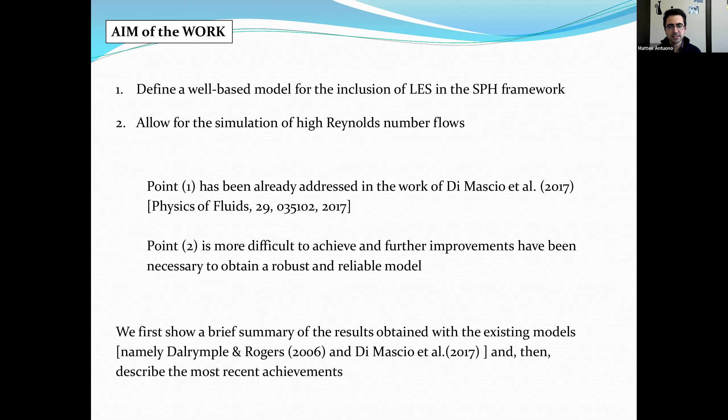I recall that we are also going to do some comparison with existing models in the SPH literature, specifically the model of Dalrymple and Rogers, one of the first attempts to include LES modeling inside the SPH framework.

As for the model of Di Mascio et al., this has been defined by using a Lagrangian filter, here denoted by the letter phi, applied to the Navier-Stokes equations for compressible and barotropic flows. The filtered quantities are indicated by the tilde symbol, and after some computation it's possible to obtain this system, which has basically the same differential operators as the standard SPH models, plus some additional terms in the continuity equation, specifically C1 and C2, and additional terms in the momentum equation, M1 and M2.

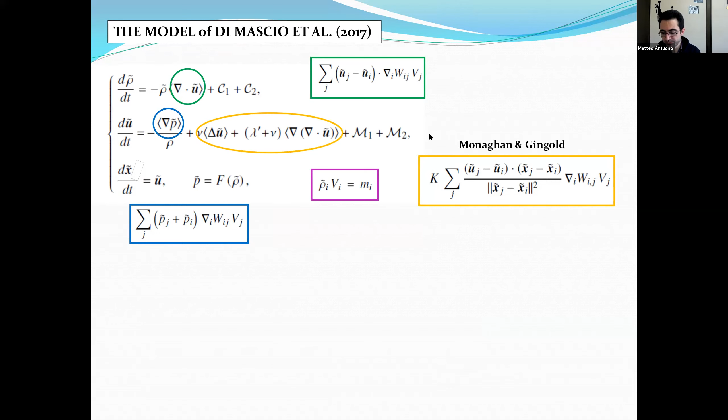For C1 and M1, these are the filtering terms, accounting for the differences between the filtered and unfiltered differential operators. It's possible to show that these are very small and can be neglected.

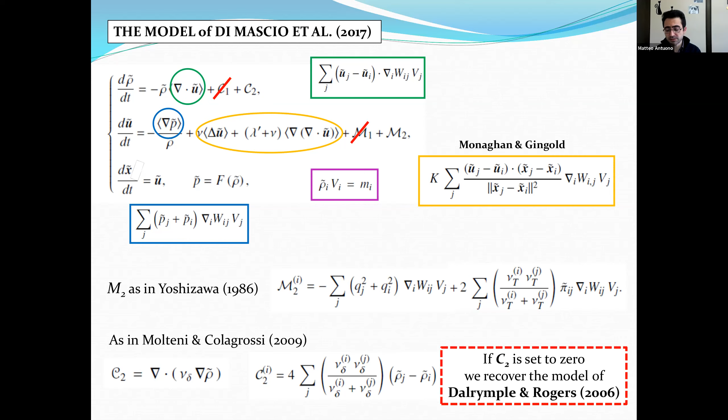For the remaining terms, these come from the LES approach. The term M2 in the momentum equation has been modeled following a standard approach going back to the work of Yoshizawa, while the term C2, which is new and just arises in the SPH framework, has been modeled through the diffusive model of Molteni and Colagrossi. What's very important to stress is that if we neglect the term C2 completely, we obtain back the model of Dalrymple and Rogers.

Here are some details about the modeling and discretization of these terms. For the term M2, we use a standard coefficient from the LES literature, going back to Yoshizawa and Smagorinsky.

For the term C2, we defined a sort of diffusive turbulent viscosity, denoted by nu delta, which contains a dimensionless coefficient C delta, set equal to 1.5 to obtain an order of magnitude comparable with the diffusive term of Molteni and Colagrossi.

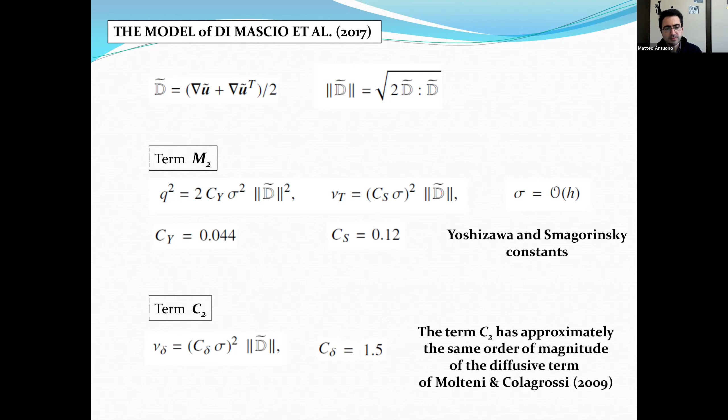This analytical solution allows us to generate a pattern of vortex structures inside the fluid domain, and this forcing term is multiplied by a ramp which goes to zero after t equals 1.

So what happens? For example, we can see the kinetic energy in the left figure. We have an initial increase of kinetic energy when the forcing term is acting, different from zero. Then for t greater than 1, the forcing term is zero, and we have freely decaying turbulence. Conversely, on the right figure, we see the typical vortex pattern induced by the forcing term.

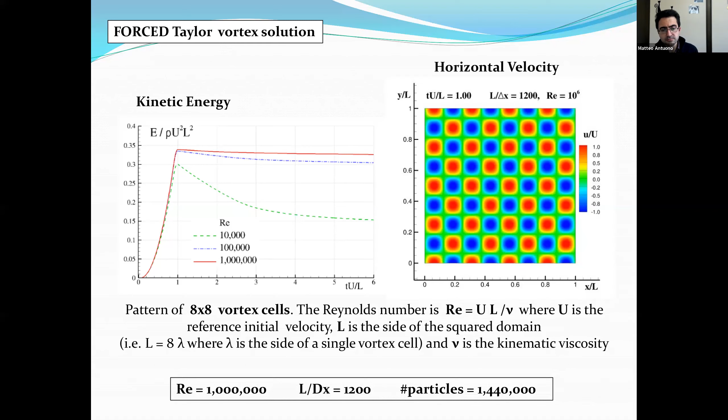In this specific simulation, we are considering Reynolds equal to 1 million and about 1,400,000 particles. These are the results if we apply directly, without any additional tool, these models—the Di Mascio et al. and the Dalrymple model—to this case.

As you can see, we have the onset of the so-called tensile instability, which leads to the generation of large void regions inside the domain and leads to the complete destruction of the solution.

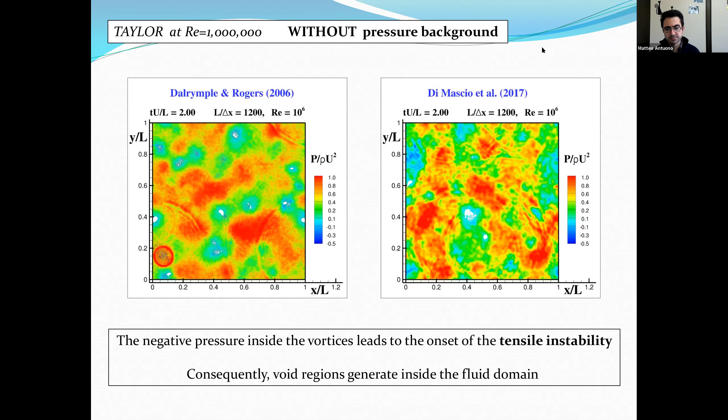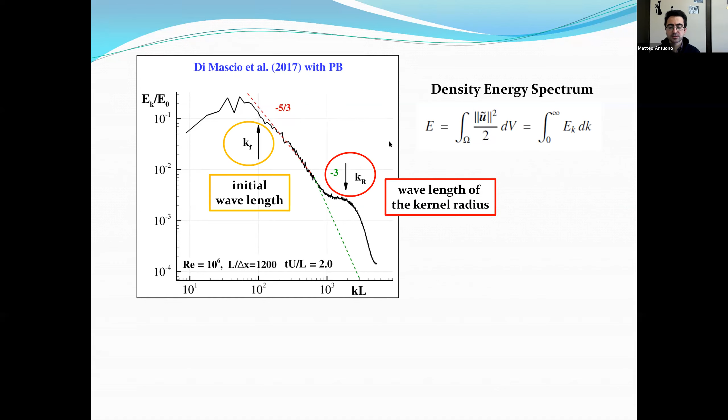However, if we compare the density energy spectrum with the theoretical findings, which predict two different behaviors, a minus 5/3 law and a minus 3 law, we observe a deviation of the density energy spectrum predicted by the model of Di Mascio et al. at wavelengths comparable with the kernel radius. The same is observed using the model of Dalrymple and Rogers.

This is because we are using the pressure background, and this pressure background induces a kind of particle resettlement at wavelengths close to the kernel radius. This resettlement has its own content of energy, which is observed in this strange bump profile of the density energy spectrum.

So to solve this problem and obtain a density energy spectrum in good agreement with the theoretical findings, we first tried to remove the pressure background, but at the same time we also had to remove the tensile instability. For this reason, we used a tensile instability control term like that described in Sun et al. in 2019.

This tensile instability control term relies on the use of a switch inside the pressure gradient, which goes from a plus formulation, Pj plus Pi, when the pressure is positive, to a minus formulation, Pj minus Pi, when the pressure Pi is negative.

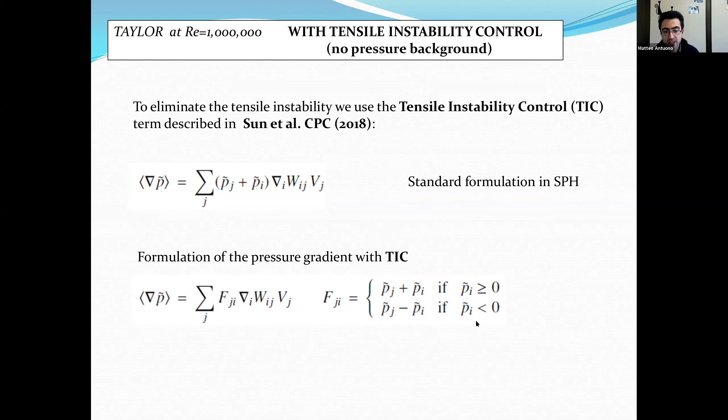Applying this tensile instability control without pressure background, we obtain bad simulations, especially for the pressure field, and also in a minor way for the vorticity field.

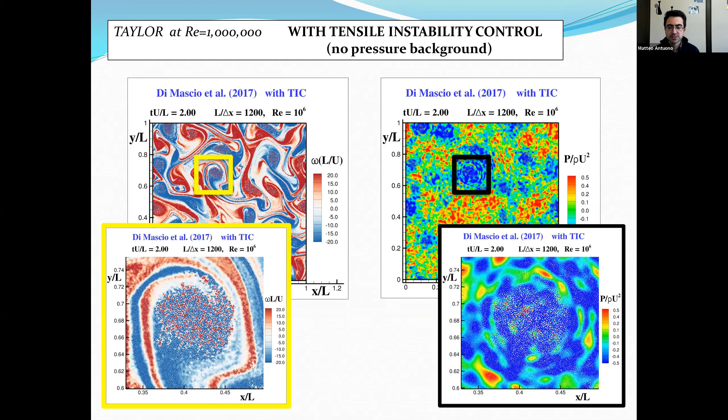This is because even though we no longer have the occurrence of tensile instability, we still have a very noisy and disordered particle distribution, especially in those regions characterized by negative pressure.

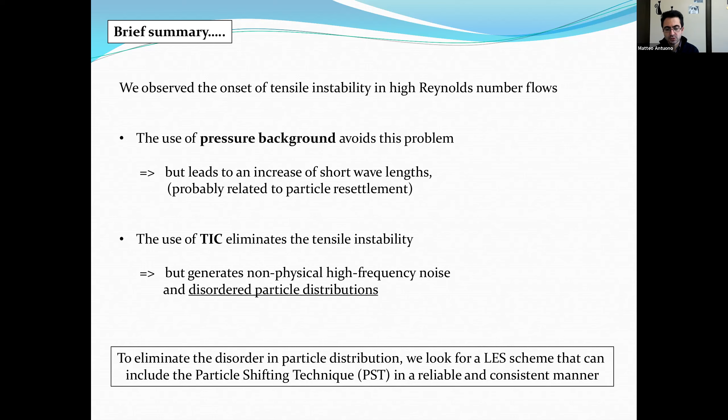So we added one last possibility: a term which regularizes the particle distribution. We tried to include in the model the particle shifting technique. Unfortunately, this is not possible inside the old model of Di Mascio et al., and we had to redefine a new model in order to include the PST in a reliable and consistent way.

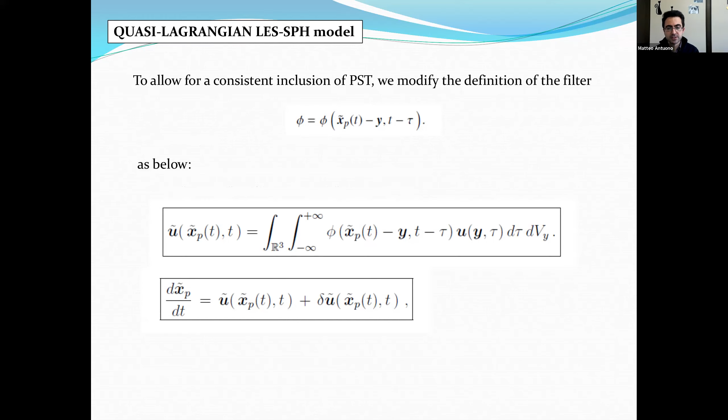The approach is basically the same as that shown for Di Mascio et al. We again have a filter, but in this case the filter is not Lagrangian but quasi-Lagrangian, because we added a small velocity deviation in comparison to the Lagrangian velocity.

We can apply this filter to the Navier-Stokes equation, integrate over the free domain, and at the end we obtain a system with additional terms, C3 in the continuity equation and M3 in the momentum equation. Like for the previous model, C1 and M1 are negligible.

Differently from the model of Di Mascio, the term C2 is modeled through the diffusive term of the delta-SPH model, because this is a fourth-order operator and is expected to work more efficiently at shorter length scales.

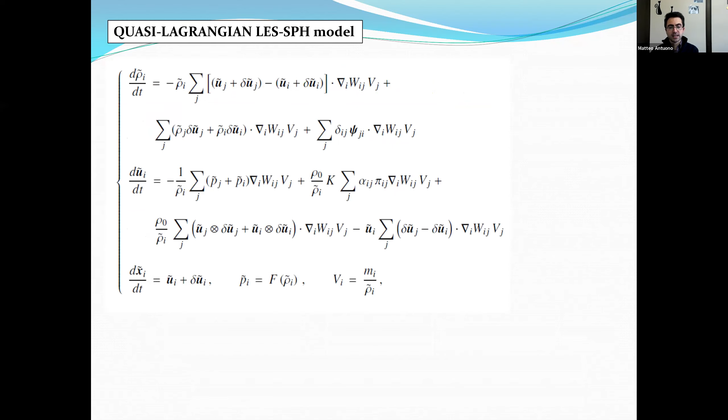Finally, we have the other terms depending on the addition of these small deviations, which, if small, allow neglecting the terms C3 and M3, leaving just one term, which can be modeled using the standard SPH differential operator, as shown in this discrete modeling of the continuous equation.

In our case, we model the velocity deviation through the particle shifting technique proposed by Sun et al. in 2019. This was the first simulation with the new model, again at Reynolds equal to 1 million.

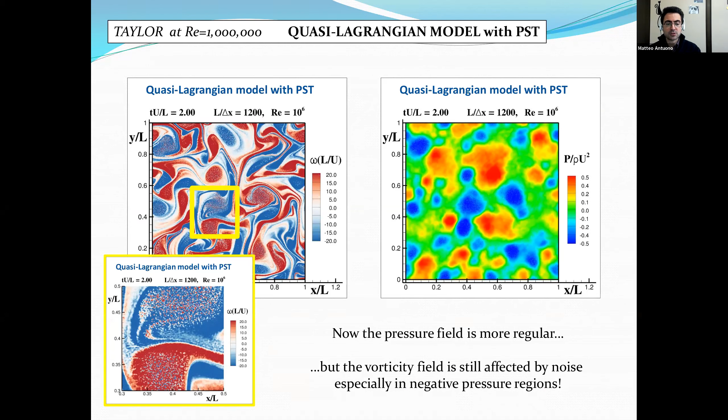As you can see, we recover a good distribution for the pressure field, but again the vorticity field shows problems inside the core structures characterized by negative pressure. This is because particle shifting alone is not enough to counterbalance the action of tensile instability.

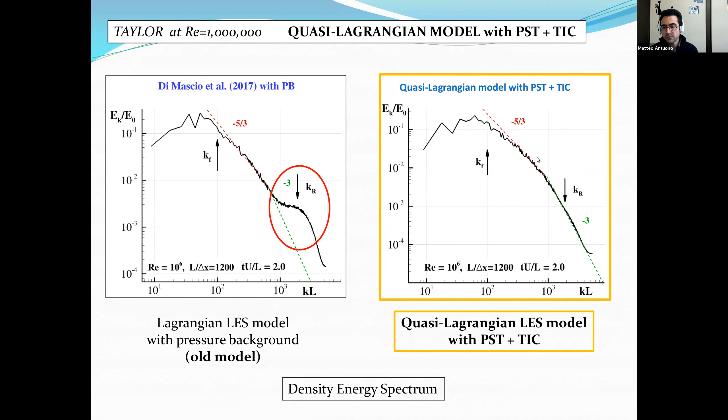Here I show a snapshot detail of the kinetic energy for both models: on the left, the Di Mascio et al. model, on the right, the quasi-Lagrangian model. As you can see, the new model is completely free from the short-length noise which affects the solution of the Di Mascio et al. model.

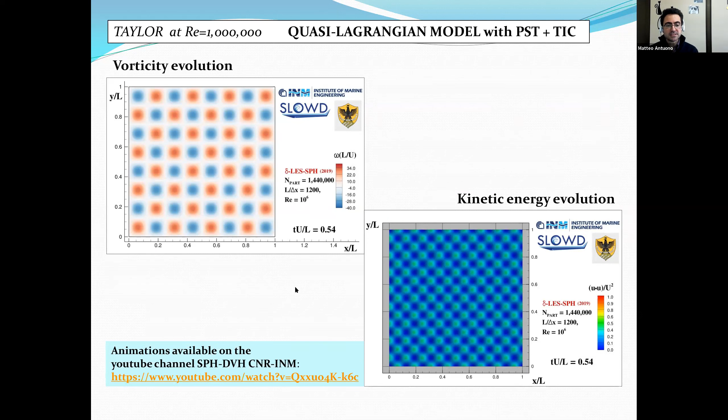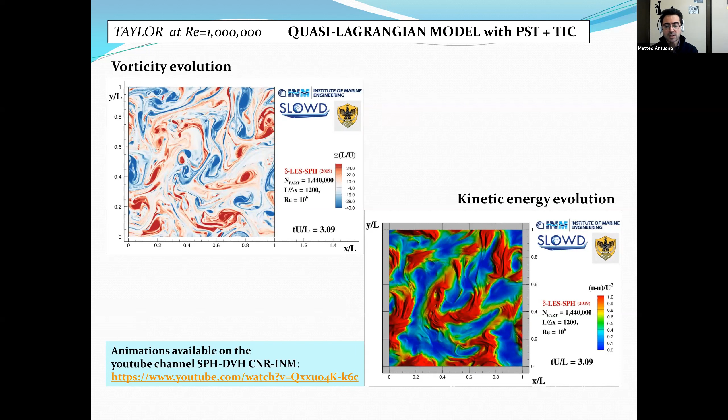Here I just show you some snapshots of the evolution for these cases. The animations are available at this YouTube channel of our SPH group, at the link below. These are the first instances in which the forcing term is acting and generating the vortex structure. Then, when the simulation goes on and the forcing term is zero, we have the onset of instability.

After the simulation in 2 dimensions, we moved to 3 dimensions. Again, we studied freely decaying turbulence. In this case, we used the same approach, that is, fluid at rest with a forcing term acting in the first second of the evolution. But here we used the analytical solution that I found in this work, Antuono 2020, in the Journal of Fluid Mechanics, which is an extension of the Taylor solution to a 3D periodic box.

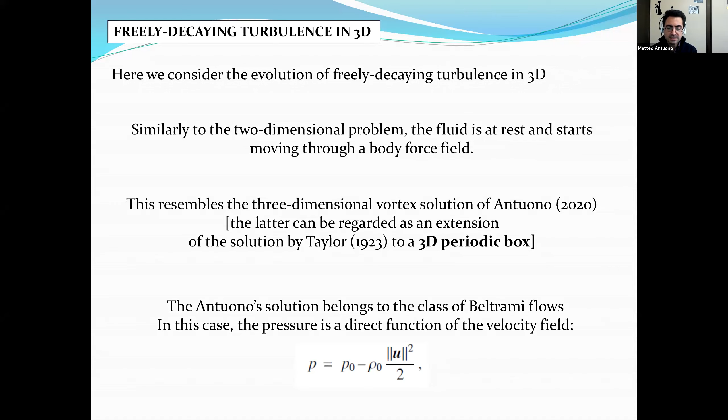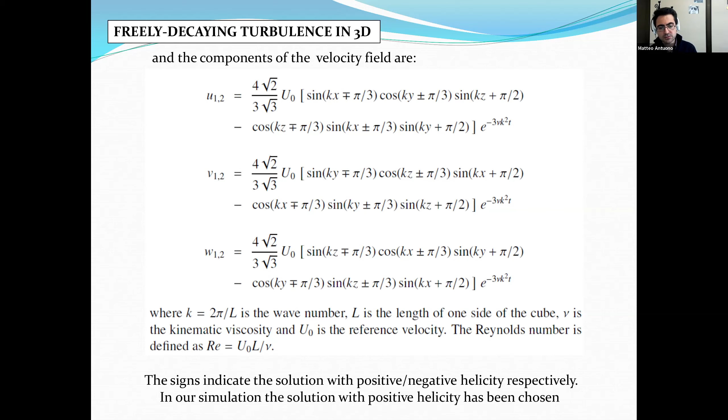In this case, the pressure field is obtained as a function of the kinetic energy, while these are the expressions for the solution of the velocity components. We actually have 2 different components, denoted by subscripts 1 and 2, depending on whether the solution has positive or negative helicity. I recall that helicity is the dot product between the velocity and the vorticity field. However, for the sake of the simulation, you can choose either one. The solution is practically the same.

When we studied this three-dimensional simulation, we also compared with a finite volume model, an Eulerian finite volume. Since these models are really different, we have on one end a quasi-Lagrangian SPH model, and on the other end an Eulerian finite volume model. The transient evolution for the kinetic energy is quite different between these models, so for the comparison, we chose different time instances but with the same amount of kinetic energy.

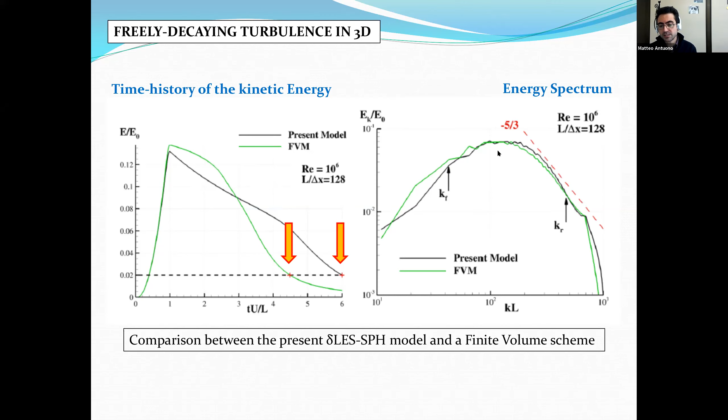These are the comparisons for the energy spectrum. As you can see, both models agree with the theoretical rate of decay, which in 3 dimensions is -5/3, and they also agree well with one another.

Just a final example before ending my talk, which is somehow a more practical application. In this case, we are studying a fluid which is put into motion inside a wing reservoir, inside a rectangular tank, and is subjected to a strong vertical acceleration, up to 10 times the gravity acceleration, as you can see in the bottom right panel.

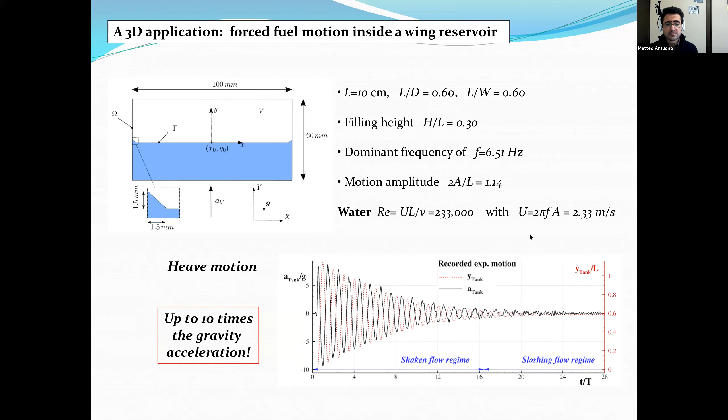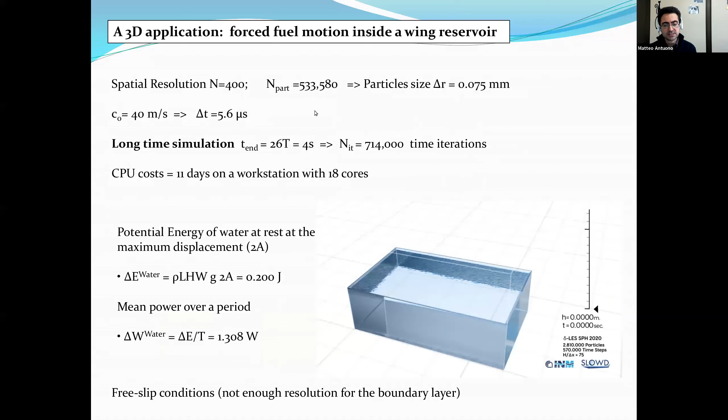The Reynolds number here is 200,000, and we use up to 500,000 particles. This is a snapshot of the three-dimensional domain, and here are some snapshots of the evolution.

What is very good for us is that both the three-dimensional model and the two-dimensional model predict results which are in fairly good agreement with the experimental measurements.

However, for all the details on this simulation, you may follow the presentation by my colleague Salvatore Marrone, which will be given at the SPH workshop of this year. And for the animation, I again address you to the YouTube channel of our group at the link below.

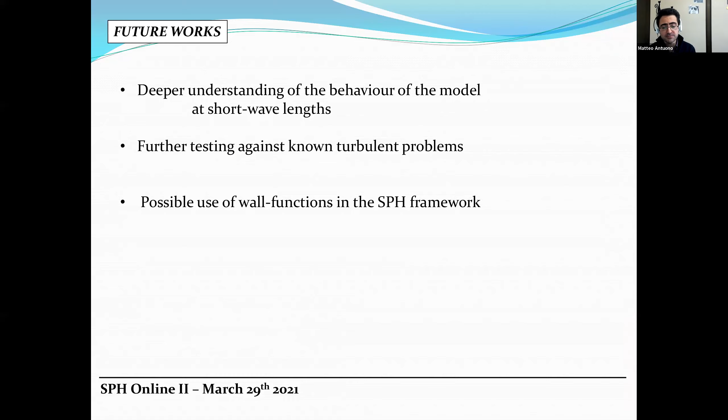Well, for what concerns future works, we are still trying to find known turbulent problems to test our model, and we hope soon to start studying a wall function for this delta-LES-SPH model. Thank you for your attention.

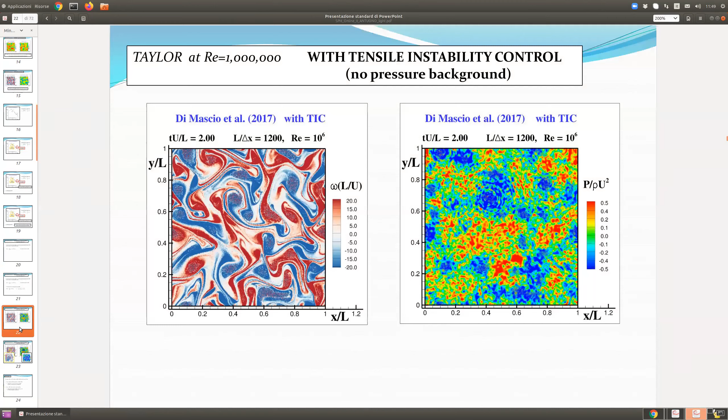Thank you very much for the very interesting talk. I could imagine that this delta-LES-SPH will be important in future. Out of interest regarding your 2D test case, how did you validate your results? Have you checked how the enstrophy within the box is scaling in time, or how did you check whether what you observe in general is valid? I understood you were looking to reduce the noise at small scale, but when we did this kind of investigation, we always also looked at the enstrophy scaling in time, because this seems to be characteristic in 2D turbulence. Can you elaborate on that, please?

Actually, we had two different problems. One was to solve this strange deviation of our model, and then obtain back a good behavior. But in this case, we just looked at the density energy spectrum. We didn't follow the evolution of the enstrophy field. We just looked at the theoretical behavior, the -5/3 law and the -3 law for the density energy spectrum.

Okay, thanks. May I ask a short other question as well? Yes, please. Regarding your personal opinion, so I really want to hear your personal opinion on this. I think from an engineering point of view, with this tensile instability control, we sacrifice a little bit of conservation for accuracy. How do you think about that? Because in engineering, I have the feeling that finite volume schemes are used instead of finite element exactly because of this.

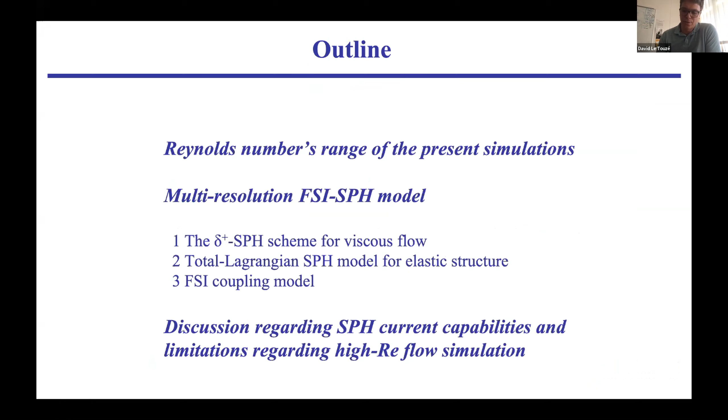In the present simulations, the ones I'll show next, I highlighted where we are in the Reynolds number range. In 2D we have fully resolved simulations from 100 to 100,000 Reynolds number, and in 3D we have laminar situations and quite high Reynolds number situations, but where we discard viscous effects—so in reality it's an infinite Reynolds number simulation. Bear this in mind; you'll see this pink code on every slide indicating whether it's 2D or 3D and what the Reynolds number is.

The delta-plus-SPH model was already presented quite extensively by Matteo and a bit by Andrea, so I won't stay long there. It's the weakly compressible SPH model with artificial viscosity and the delta term in the continuity equation—this is delta-SPH.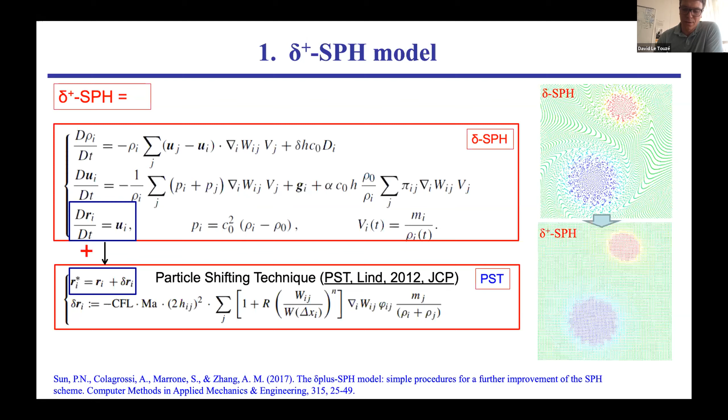In addition, there is the particle shifting technique, with this form of shifting displacement used in this work, which regularizes the particle distribution during the simulation. There was some discussion on the consistency of such a technique—at the next SPHERIC we'll have an extended discussion on the consistency of particle shifting—but at least in terms of displacement, it is consistent and has no effect on convergence.

When you have a free surface, since it has a kinematic boundary condition you should respect, the idea is not to shift particles there. We have a specific treatment where in a region close to the free surface, particles are shifted only tangentially, and at the free surface they are not shifted at all.

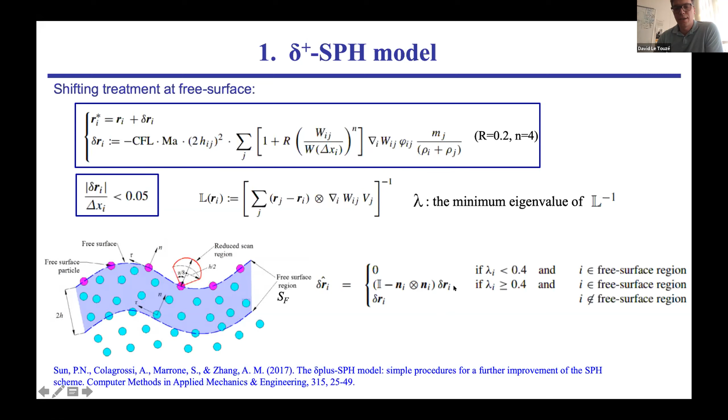Using this delta-plus-SPH, Peng-Nan and colleagues from Italy found that tensile instability was much reduced compared to standard delta-SPH—particle shifting helped prevent tensile instability. But unfortunately it's not valid for all cases, and here you have cases where delta-plus-SPH fails to correctly predict the attached flow.

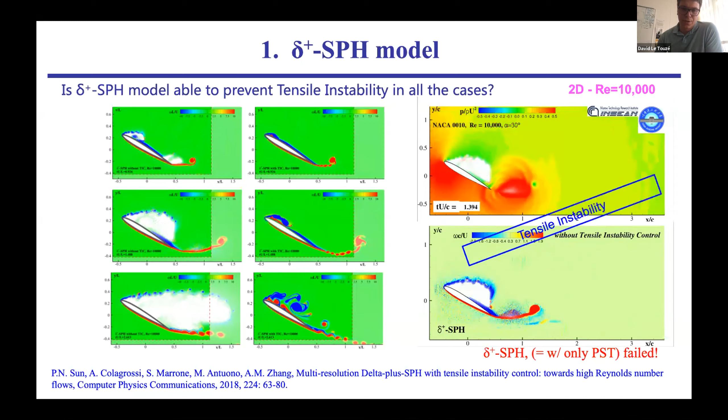So Peng-Nan and colleagues introduced this tensile instability control, described already by Matteo, with the idea that if you rewrite the Pi plus Pj version of the gradient used for conservation, with an objective of conservation, in this more accurate form, you get this 2Pi gradient which acts as shifting, as a regularizing force, if the pressure is positive.

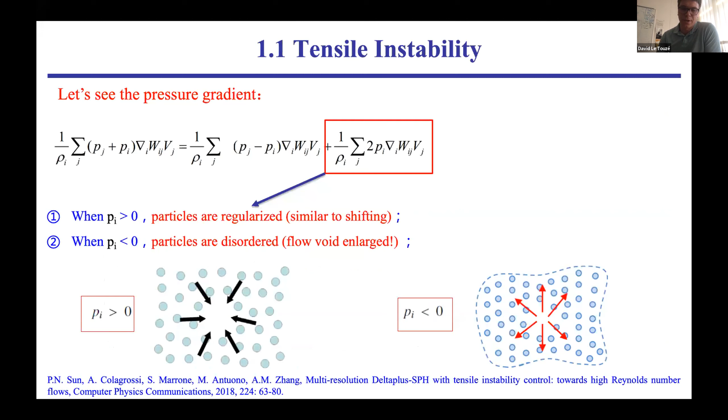But if P is negative, it acts the opposite way and tends to create voids, which we could see here on the top part of the profile. So to avoid this possibility, we get rid of this term.

Of course this has an impact on conservation a bit, as just stated. We do this only when the pressure is negative and also when we are not close to the free surface—otherwise the formulation Pj minus Pi violates the free surface condition in an integral way, and we get free surface instability.

So we use this tensile instability control in the simulation. Using both particle shifting and tensile instability control, you go from there to here. If you just use tensile instability control without particle shifting, the flow stays attached in this simulation, but you see some noise in the pressure field and in the vortices—so we really need both.

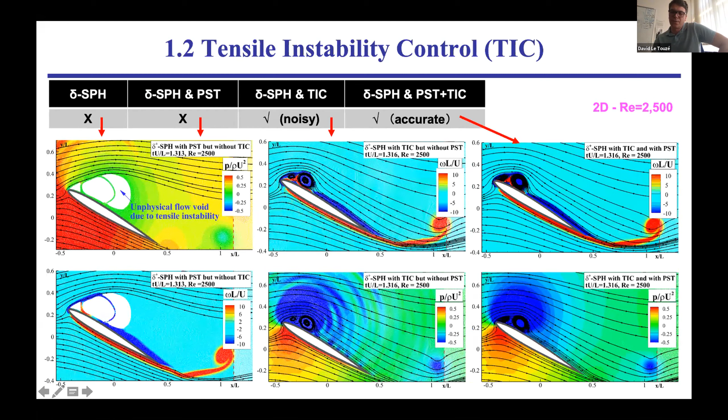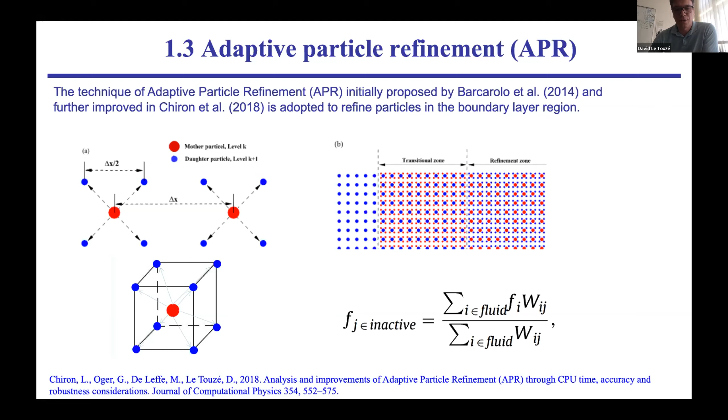The next ingredient we need is particle refinement. If we want to do complex flows, what we use is the adaptive particle refinement we proposed here in Nantes.

But I guess a quite accurate description of the boundary layer there, even at Reynolds numbers in the range of 10,000, even more, up to 100,000 maybe. But in the range of 10,000, we are okay with APR and this delta-plus-SPH model with tensile instability control.

Now I will jump to the structure model. So when you want to do FSI in SPH, with an SPH fluid solver, you have two possibilities. Either you say you will do a full FSI SPH solver, as is proposed here.

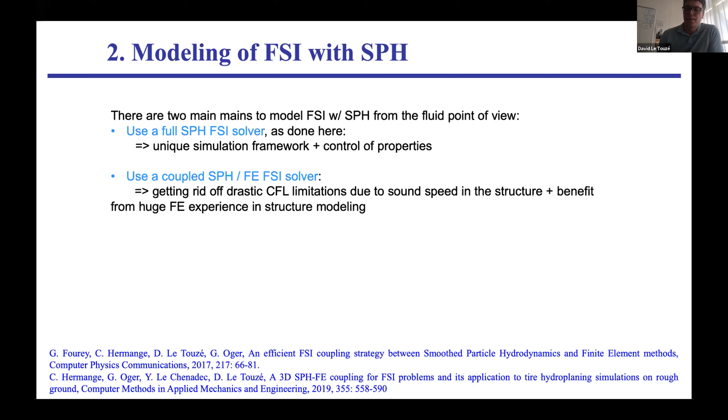So this has been implemented. It is well known that when you do this kind of SPH structural model, there is another kind of instability, an hourglass kind of instability which can appear. You can get rid of this with artificial viscosity or with some specific control, or using stress points and projections, etc. Here we use an artificial viscosity.

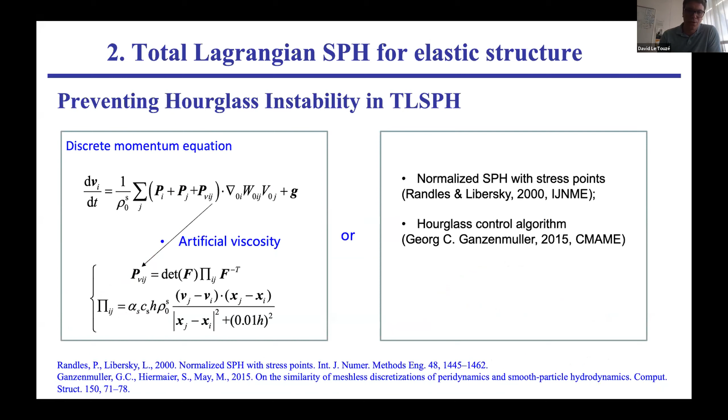And we tested this structure. So this is simply an elastic plate which is hinged to a rigid cylinder, and it's free to move due to gravity in the void. And it is compared to the result by Turek and Hron.

So we now have this validated structural solver, and I can go to FSI.

So to couple these two, SPH structure and SPH fluid solvers, since we don't have the same time steps, or at least it's clever not to have the same time steps, what we use is an MSS coupling algorithm with multiple time steps, sub-time steps in the structure, as sketched on the right part of the slide.

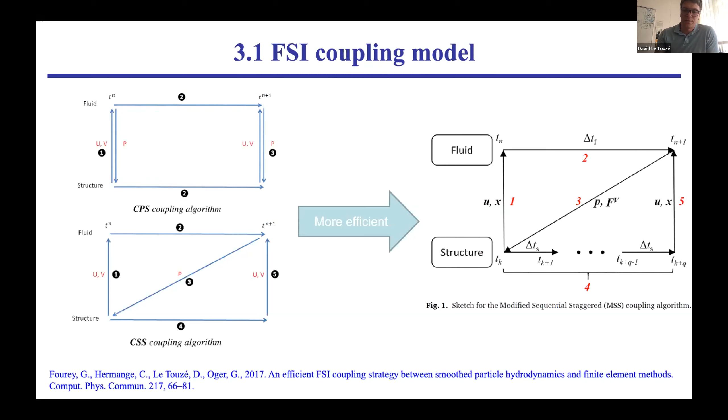And we will test this FSI solver on different test cases. Most of these results were published in this recent paper in Ocean Engineering.

So we first took the famous test cases by Turek and Hron: FSI1, FSI2, and FSI3. FSI3 is more challenging because the density ratio is 1, the speed is a bit higher, and the Young modulus is also a bit higher. We will use these test cases to validate our model.

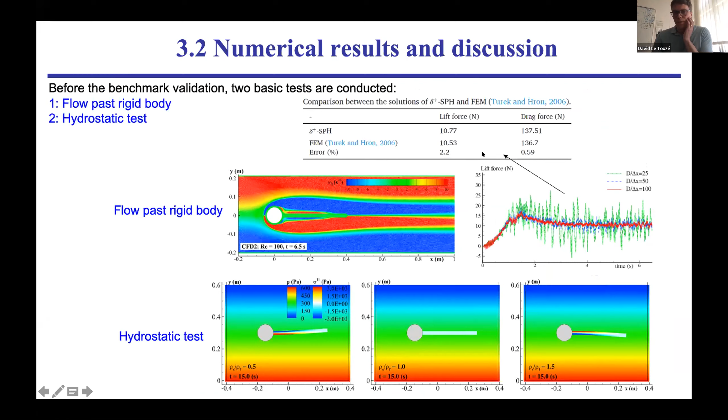Before these validations, we did a hydrostatic test case, which is always not so easy, and the flow past a rigid body to check the accuracy of the solver before activating the fluid structure interaction. Here is a convergence plot and comparison with finite element results of Turek and Hron, with errors on the force of the order of 1%.

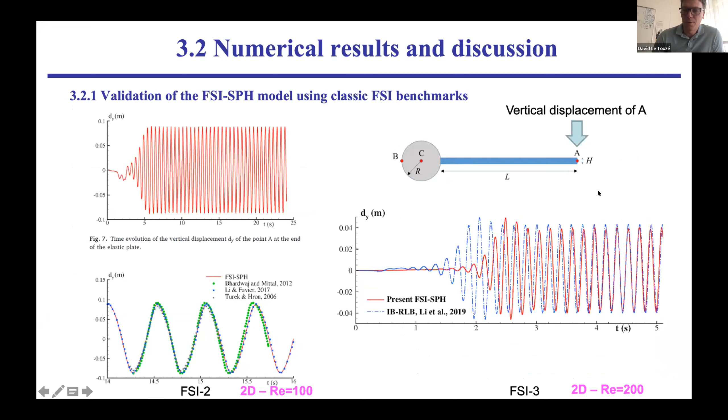These are the results for the FSI2 and FSI3 test cases. The Reynolds number is really moderate, quite low, but the flow structure is already quite complex. For FSI2, we compare to results of Turek and Hron, and also to LBM results. For FSI3, we compared to LBM simulations we did in my group. We have good agreement on the different test cases.

And we proposed an FSI4 test case with the presence of a free surface, which is quite complex because due to the oscillations of the elastic plate, you have areas of low pressure which interact with the deflected flow. You have different sources of pressure variations along the profile, and the flow and structural deformations are quite complex even at this low Reynolds number. Maybe this test case can be used by others in the future.

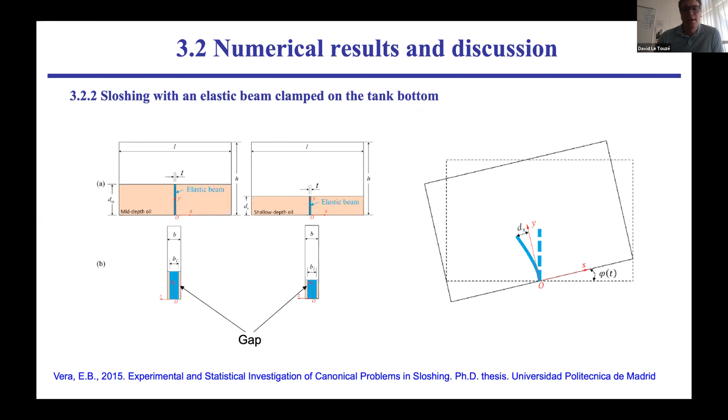What we also did, then we went to 3D. One of the nice test cases in 3D is the one developed by UPM in Madrid, where you have oil and an elastic beam in a rotating sloshing tank.

So we made comparisons. If you do a 2D modeling, we showed with my PhD students in the past that there is a 3D boundary layer effect. You have a boundary layer along the two boundaries of the tank, which is very important. If you do a 2D versus 3D simulation, you get different results, and you are not able to be close to the target. Here we clearly see this boundary layer effect, and the 3D result is much closer to the experimental one than the 2D one. We are at a Reynolds number of 1000, but in 3D this time.

And then we did a much higher Reynolds number, which depends how it's defined, but if it's defined with the water depth, it's around 400,000. In this case, we made the assumption that we could get rid of the viscosity, assuming viscous effects are negligible. So in reality, we don't simulate this Reynolds number, we simulate an infinite Reynolds number.

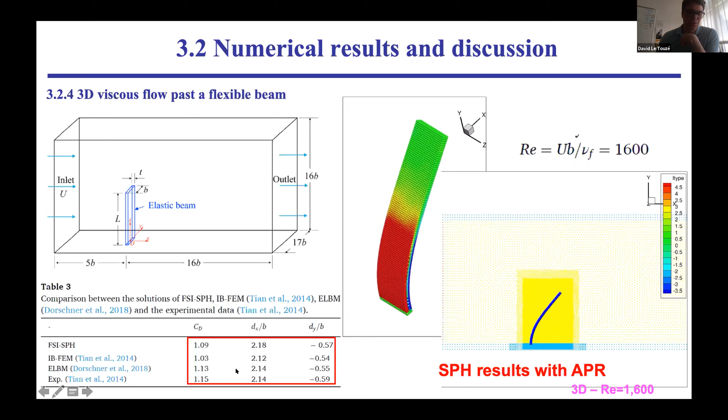We compare to results from the literature and experimental data, and you see that in terms of vortical structures induced by the problem, it's quite complex. We compare this also with LBM, and it's in quite good agreement. Again, this is 3D and Reynolds number 1600.

So regarding these results, what we can say is that we have a quite accurate and versatile FSI model in the end, both in 2D and 3D, for low Reynolds number and for infinite Reynolds number, like this dam break problem with an elastic gate. So we are quite happy with the results.

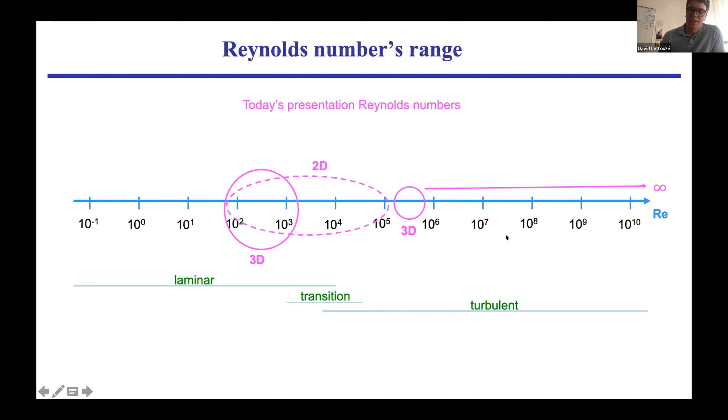Now, if I go back to this slide, this is where we were in this presentation. And it's in my presentation, but in the whole workshop today, it's more or less the case: we have fully resolved viscous flows at Reynolds numbers between, say, 100 and 100,000 in 2D, and fully resolved results at Reynolds numbers between 100 and 2,000 in 3D.

Okay, for high Reynolds flows, very high Reynolds, viscosity is negligible because we have impact or fast dynamics kind of flows. But in the main use of current mesh-based CFD solvers, like car industry, pumps, turbines, ships, planes, etc., the range of Reynolds number is not this at all. It is this, but with important turbulent effects, so not the possibility to get rid of viscosity. And so we are not there, okay, in SPH. We are there, but we are not there.

So it's what I wanted to discuss a bit, a CMAME paper in 2011 we did with my Italian colleagues. We investigated the boundary layer only at Reynolds 10,000 in 2D, and you see that we already needed very fine particle size compared to finite volume to capture the complex boundary layer. And this is 2D, Reynolds 10,000. So if we want to go to 3D, like on a ship, the boundary layer at the end of a ship is already only a few tenths of centimeters for a 300-meter long ship, for instance. This is not enough, and APR is not enough.

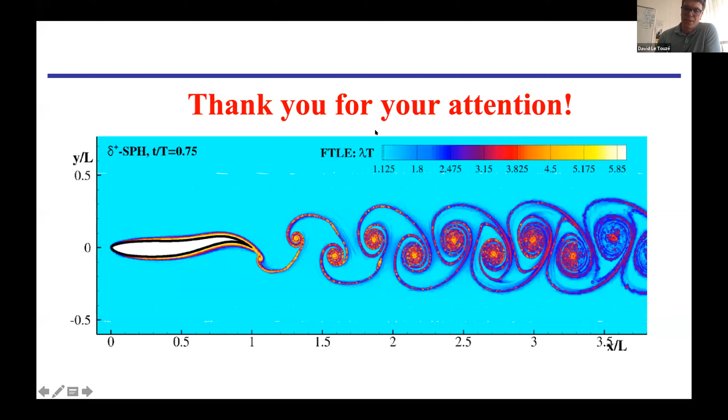Regarding your FSI simulation, may I know, do you employ any turbulence models to ensure stability at high Reynolds number? No, as I said, the high Reynolds number case which was displayed, the only one is this one, and it's inviscid, okay. I mean this is a physical Reynolds number, but the simulation is inviscid. The Reynolds number is infinite. Okay, thank you, so there is no turbulence model at all.

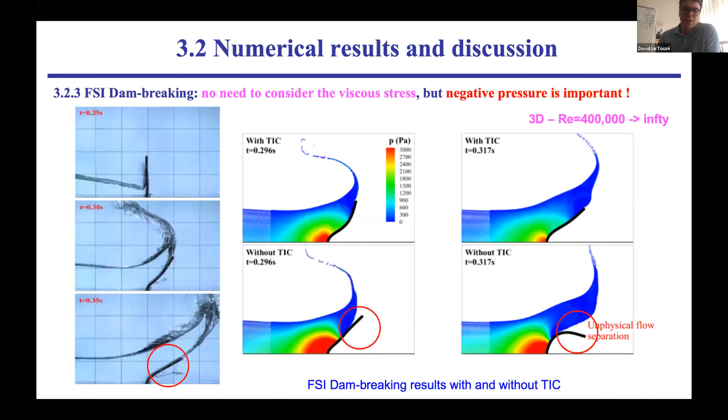But as you see in this kind of results, and this was said already by Damien, in this kind of flows it's perfectly legitimate to get rid of viscosity. For impact flows, it's mainly driven by inertia, so the pressure is driven by inertia. And of course, if we want to go to other kinds of high Reynolds flows, like flows past an object or a profile object, as I mentioned, there it's another story. You have turbulence which is originated from the boundary, and it's another story. Because, maybe I was a bit quick, but...

There are two kinds of turbulence. You have ambient turbulence, like in river flows, atmospheric flows, etc., and you have turbulence which is originated from the boundary. And in the large majority of industrial applications, turbulence is originated from the boundary. So you need an accurate boundary layer at high Reynolds to describe these flows. It's not the same, it's quite different, but this is the vast majority. And you have cases where turbulence can be neglected, and this is only a few cases, impact flows, gravity waves, etc., which are currently addressed by SPH.

Okay, thank you, Professor David. Yes, thank you. So do we have any questions, any other comments?

I think this part is very important, and we can consider it in the panel discussion today. Professor Damien Violeau also mentioned this, for consideration of the wall functions, paying attention to accuracy, and turbulence will be of secondary effect, but depending on the Reynolds number and whether we're doing industrial simulation applications, as shown in this slide.

I think we can have one final question. Please, Professor Leon. If turbulence is not properly resolved, why are there differences between 2D and 3-dimensional simulations?

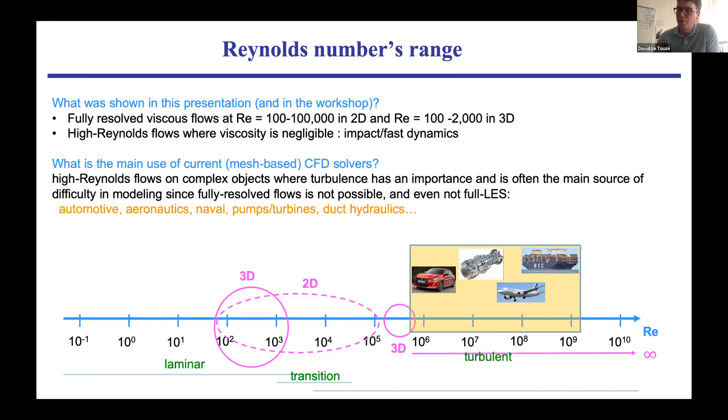Because some of the problems in the last 2 or 3 applications are purely 2-dimensional. So in what I showed, the 2D problems were fully resolved, either laminar or transitional, but DNS if you want. I'm not sure where exactly you define turbulence starting, but it was fully resolved for the 2D cases, even the highest Reynolds number case shown, which was not FSI.

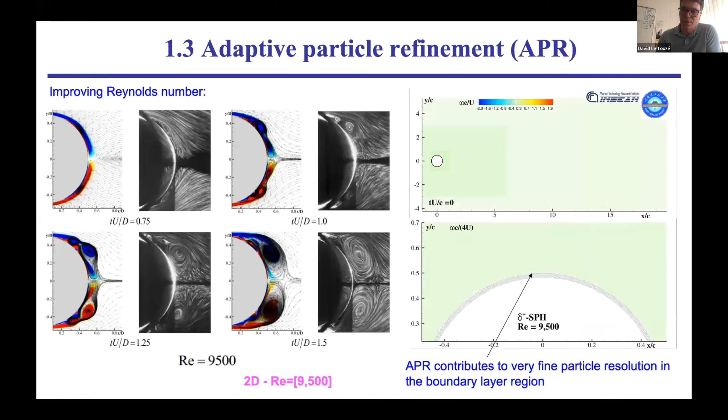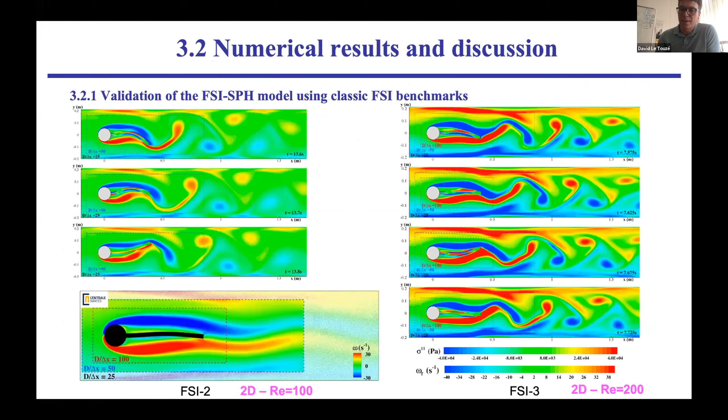Where was it? Sorry, I lost it here. Okay, so I guess this is fully resolved, no turbulence model, DNS. In 3D, I only displayed laminar test cases, so there is no turbulence physically. The only non-laminar test case I displayed was one where turbulence is obviously there, but it has a negligible effect on the problem because it is an impact problem.

So in this simulation, the 2D, 3D FSI SPH results are roughly the same. But I remember some of the simulations had 2D and 3D results that were a bit different.

Yeah, they are different in this example because it's much more viscous. What happens on the walls, the boundary layer along the two side walls of the tank, induces a 3D effect. This is not turbulence though, it's a laminar situation.

Thank you. I think there's one question in the chat section: Professor, is your APR solution adaptive?

Is it adaptive? It's more and more adaptive now. In this simulation, it was not much adaptive. What we do is becoming more adaptive, but not as adaptive as in finite volumes or finite elements, where it really follows vorticity contours very closely. We are going towards adaptivity. For now it moves with the body and can change shape a bit, but it's not as adaptive as AMR in a standard or advanced CFD solver.

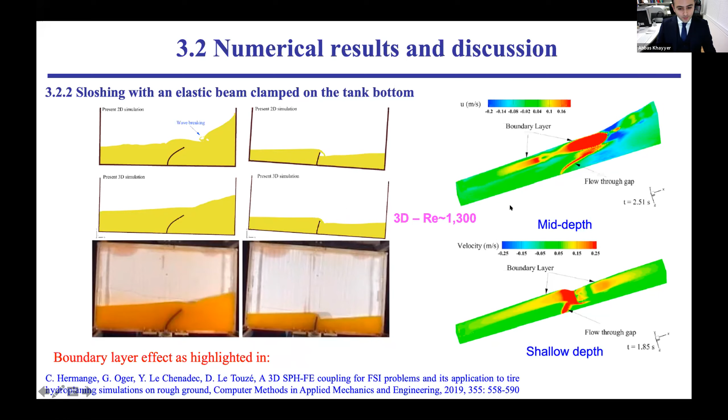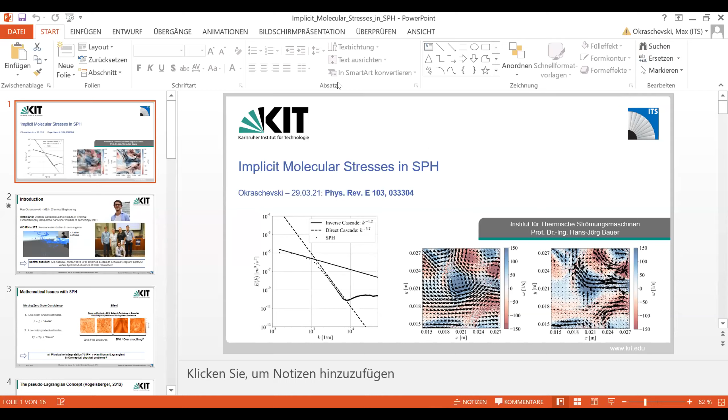Max, please. Right, thank you. I will share my screen. So I'm working. No. Can you see the presentation now? Now we see, yes, okay perfect.

Thank you for having me here today. This is a really great opportunity to present our theory about implicit molecular stress in SPH. My aim for today's session is to give you a new physical explanation for the particle bottlenecks we normally observe at high wave number in the turbulent kinetic energy spectra obtained with SPH in a DNS sense when considering turbulence. But before I dive into the topic, let me introduce myself.

I guess I'm quite unknown, so you see me in the upper right. My name is Max Okraschevski. Since 2018, I'm a doctoral candidate and researcher at the Institute of Thermal Turbomachinery in Karlsruhe, Germany. From an engineering perspective, we are interested in kerosene atomization in aero engines because we want to mitigate emissions. Our group leader, Dr. Rainer Koch, you see him here, left from Monaghan.

This is a photo taken at one of the earlier conferences, where we had the idea to tackle this problem with weakly compressible SPH in order to gain new insights into the process. In the development of our own in-house C++ code, which is massively parallelized, mainly these three co-workers were involved, especially the one on the right who focused on MPI parallelization. I think we were quite successful, as you can see from the left video.

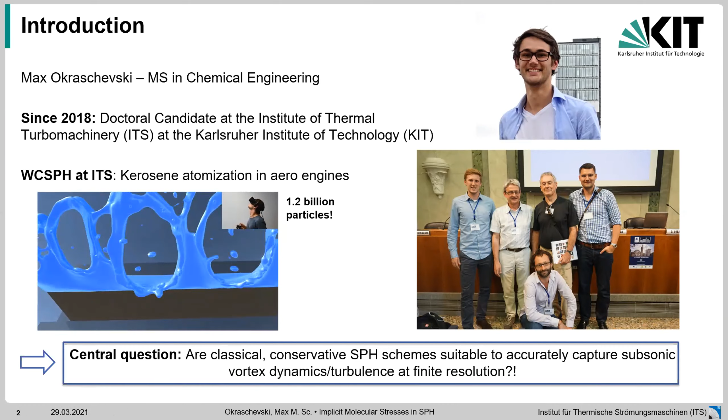When I started at ITS, there was one central remaining question for us: can we capture turbulence with our classical conservative SPH at finite resolution? I think nowadays the answer is quite well known - SPH really struggles with that due to different mathematical issues, mainly missing zero order consistency.

I just want to shortly recap what this means. Basically, if we try to approximate an arbitrary function or its spatial derivative, we end up with remaining terms which can be interpreted in SPH, on a very high level, as noise. The effect of this noise can be quite severe for the simulation results, especially for turbulence.

This was very well presented by two German researchers, I think, Bauer and Springel, already in 2012. So this is what you see on the right-hand side. They simulated subsonic turbulence, which was steady in the average sense, with smooth particle hydrodynamics as well as moving mesh-based methods. In orange, these are the enstrophy fields, or the local rotational energy of the turbulence. As you can see, whereas the grid-based methods reproduce the characteristic fine structures quite well, SPH really struggles with that and suffers from massive oversmoothing, at least for this classical SPH variant, which is caused by the noise.

So this is what we know already - SPH suffers from excessive numerical dissipation. What I now want to do is ask whether we can physically reinterpret these mathematical issues, or whether there may be other conceptual physical problems with SPH which are not governed by mathematics.

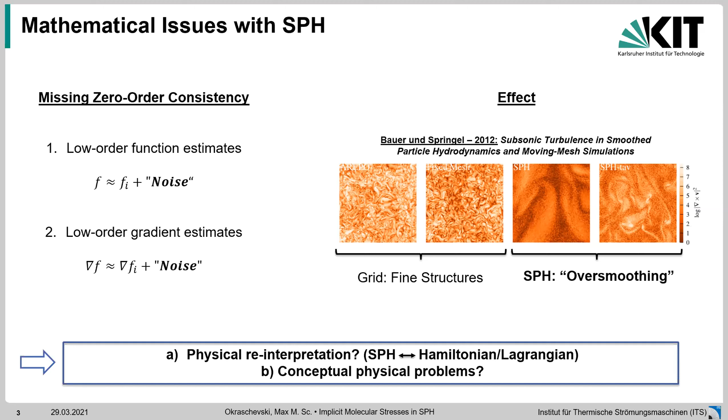Why should we do that? Because SPH is very physical from the beginning. Normally when we derive SPH as a methodology, we use the Hamiltonian or Lagrangian of the overall particle set within a top-down approach, and obtain approximations of the mathematical operators. When we do so and ask this question, we quickly realize that SPH is not fully Lagrangian at finite resolution, but behaves pseudo-Lagrangian.

The other thing is that we completely neglect deformation kinematics, and this is not described by the mathematical issues from the last slide. What I mean is basically that if we expose the particle, or the spherical kernel, to an arbitrary flow field, it will not adapt locally to the actual fluid flow. This is something we cannot consider with SPH.

This is basically what motivated our work - we wanted to quantify this pseudo-Lagrangian behavior with SPH. Therefore, I would like to draw attention to the following: namely, we can reinterpret SPH from a molecular dynamics perspective. Why is that the case? Basically, we have two strong arguments for that.

As we have seen already on the last slide, particles are bad representatives of fluid elements anyway, so they behave pseudo-Lagrangian. The thing is, if we assume that one particle is governed by Navier-Stokes, as I try to indicate here, then we implicitly assume that one particle equals one homogeneous fluid element. We know from experience that this is not always successful. The second argument is that we are already using molecular dynamics native estimates at certain stages in our code.

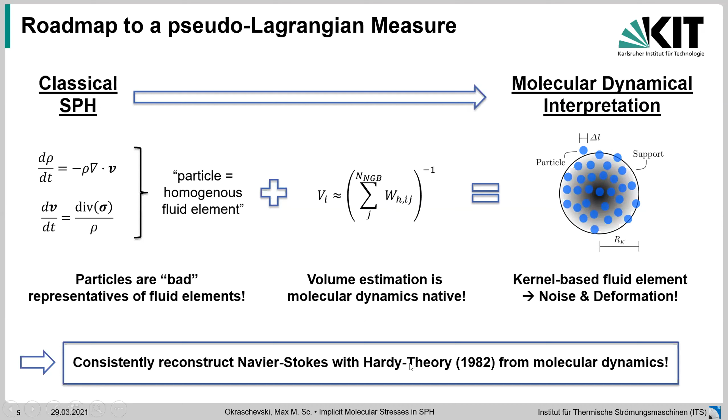So we focused on isothermal flows and obtained the so-called kernel transport equations, which actually describe the dynamics of one kernel fluid element, as you can see in the upper right corner again. And this is what I tried to summarize on this slide. So let's dive into this model.

Meaning there is already the similarity to ALE schemes, and we call this relative velocity, which is introduced due to this kernel velocity concept, peculiar velocities. And they are actually fundamental for our theory.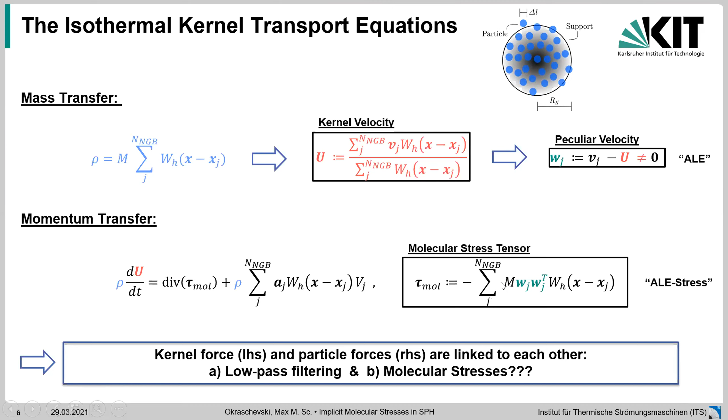Why is that the case? So we just dive into the definition itself. And as we can see, this is again a quadratic form in the peculiar velocities. That means for sure we will measure velocity noise and velocity differences on the kernel scale.

Why that? So imagine this kernel fluid element here again exposed to this linear shear flow. What will happen is for sure that the SPH particles will adapt to the velocity profile, but in a noisy way, meaning that this is quite obvious.

More interesting is now how the resulting forces are acting. And therefore, I would like to consider the following example. So this is a 1D nozzle flow, inviscid. We are not focusing on boundary layers here.

And if we now introduce a spherical kernel element here, which we call K(t1), and track it in a Lagrangian manner, then it should be stretched due to the acceleration. Why is that the case?

So let's dive into the profiles we have assumed. As you can see, the velocity profile has a non-zero curvature, and as a consequence, the forces acting on the left and right boundary of K will be unequal, resulting in stretching.

Contrary to that, the molecular stress tensor counteracts the actual Lagrangian deformation. How can we see that?

This is what we can see by linearization of the peculiar velocities. If the kernel fluid element is sufficiently small, then we see that the peculiar velocities here are a function of the gradient of the velocity profile itself.

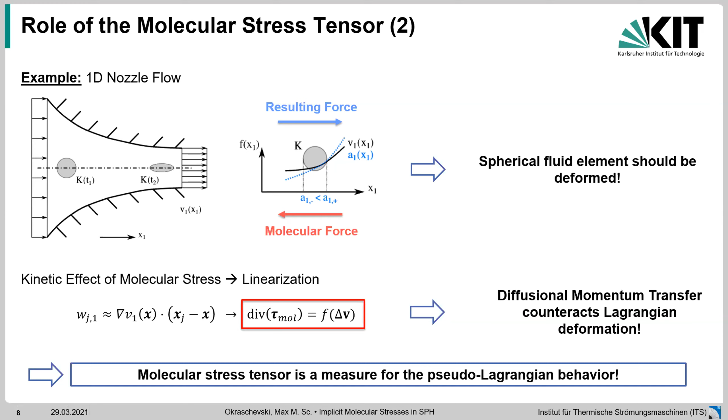So when we now apply the molecular stress tensor to a real SPH data set, as we did on the next slide, we can learn even more interesting things. We considered a turbulent flow field. Why turbulence? As already explained, the molecular forces are a function of the curvature of the velocity field, and we know that in turbulence there's a lot of wrinkling, a lot of folding, meaning there's likely a lot of velocity field curvature.

What we did here was simulate, with one of our weakly compressible SPH variants, the experiment based on the work of Rivera and Wu. We focused on weakly forced 2D turbulent flow under the assumption that the particles are twice as fine as the measured Kolmogorov scale.

What we find is that we can reproduce the flow. For example, on the left-hand side you see the evolution of the vorticity field. After a while we reach a steady state on average, so this is what we wanted to see.

And even quantitatively, if we look at the Eulerian kinetic energy spectra, the dots coming from the SPH solution are following the slopes of the inverse and the direct cascade quite well.

The thing is, we were only able to reproduce the flow with the dissipation, which is actually 2.8 times higher than the measured dissipation from the experiment in terms of enstrophy. We also observed this particle bottleneck at high wave number, which is well known in literature to also be linked to the kernel scale.

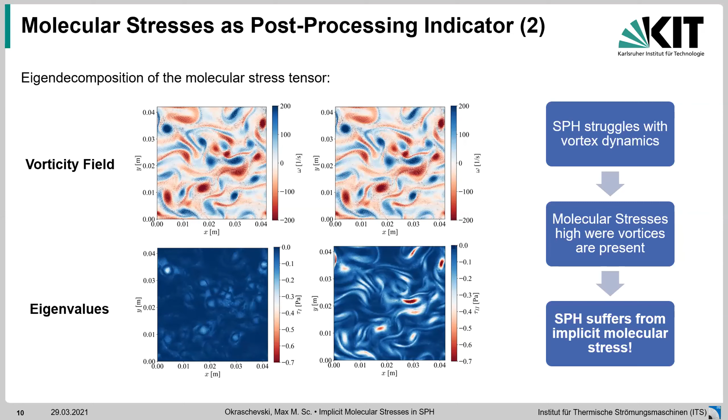Even more interesting is that not only do we have this link between high vorticity and implicit molecular stress, but also that the molecular stress is organizing itself in a characteristic spatial structure. This is what we can see if we look at the eigenvector corresponding to the second eigenvalue, because this was the most dominant one, as we saw on the last slide.

If we now dive into this black highlighted region in the middle of the snapshot, and superimpose the velocity field here as a vector field along with the second eigenstress as a vector field, and focus again on this vortex core circled in blue, you see by comparison that the velocity field and the second eigenstress are dominantly oriented perpendicular to each other. So this is quite interesting.

So what could this possibly explain? I would like to abstract this vortex core here as a generic vortex model, the simplest being the Gresho-Chan vortex. We know that SPH normally excessively diffuses this vortex in the radial direction in the tangential velocity component.

What we now presume at this stage is that these molecular stretch modes, exactly what we observe here, could be the physical explanation for that, because the molecular forces redistribute energy from the tangential to the radial velocity component.

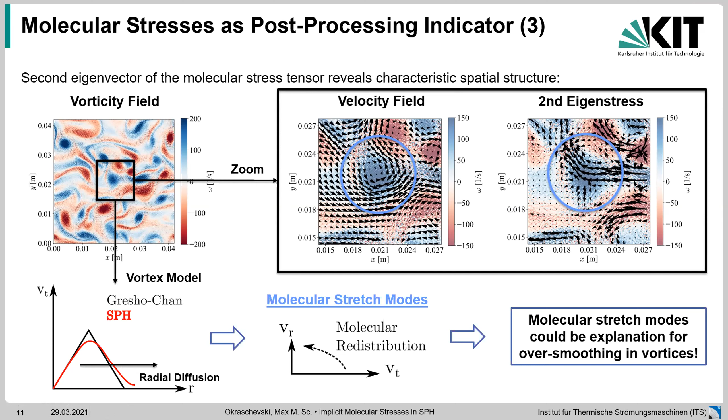And this is, I think, very valuable insight and definitely deserves attention in the future. So that's what I wanted to share with you today. I think this is only the tip of the iceberg.

Especially for theorists, this could be really valuable because what we can see from the kernel transport equations is not only that low pass filtering is eliminated in the formal convergence limit we consider here, but also that we eliminate this new molecular stress tensor term, which emerges from our molecular dynamics concept. Furthermore, as I mentioned, there is some similarity to ALE. Maybe it could be valuable or interesting to find a unified theory for that.

Finally, I would like to conclude with the following. For practitioners especially, how can we use this theory now to improve current SPH? We have recommended two research paths in our paper. One of them we already started to explore, and hopefully you will read from us very soon.

What we did is to explicitly consider the molecular forces in our SPH simulations, focusing on Taylor-Green flows for higher Reynolds numbers. This is what you see again here on the left-hand side. You see the vorticity field develops nicely into 2D decaying turbulence.

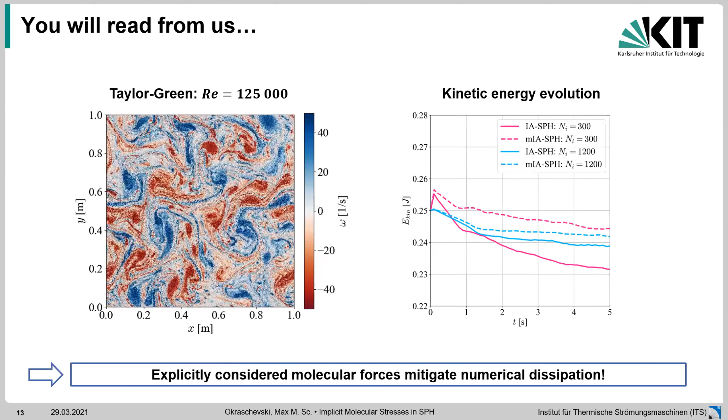What's important is if we focus on the kinetic energy evolution on the right-hand side, comparing the solid to the dashed lines representing cases where molecular forces are explicitly considered, we can mitigate numerical dissipation. Why? This is what we want to explain in our new paper.

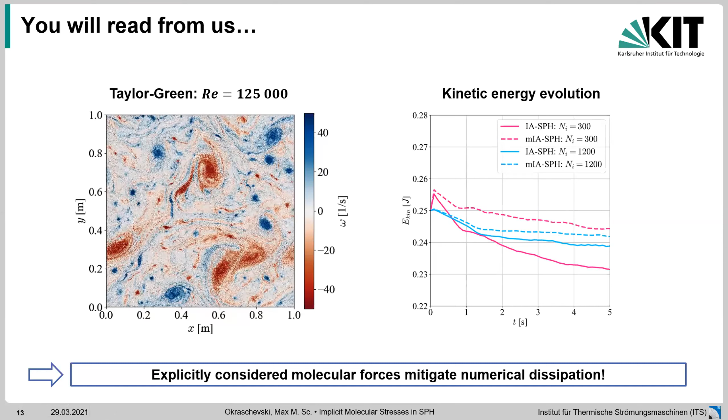In that sense, I would like to thank you for your attention. Hopefully there are some very interesting questions in order to start a fruitful discussion. Thank you again.

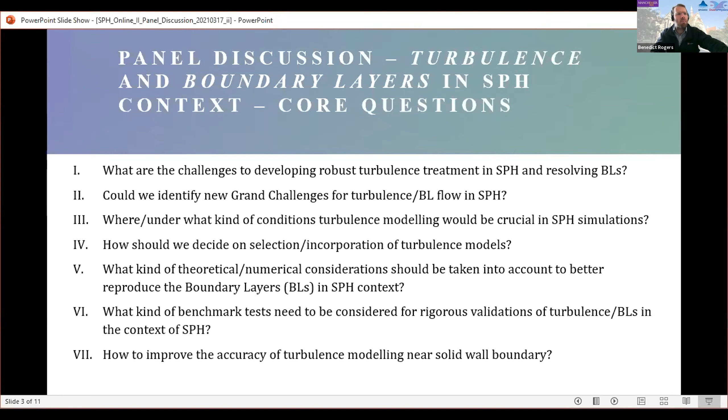So Min Luo's comment was: one intrinsic feature of real fluid turbulence is the fluctuation of fluid quantities like position, velocity and pressure. Particle methods, if not using enhancement schemes like particle shifting and diffusive terms, are subject to spurious fluctuations of fluid quantities, the magnitude of which may dominate the real turbulence associated fluctuations and hence are difficult to reproduce.

Particle methods using the enhancement schemes produce smooth results, but the real turbulence associated fluctuations may also be smoothed out. So one of the challenges is to simulate the real turbulence associated fluctuations.

That's kind of coming back to what you were talking about, Massoud. Am I right? And also what Damien was mentioning, literally, yes, just.

Yes, and again, please read Joe's paper, the 2010 paper on the SPH epsilon model, and then you can go to the referred paper on the Navier-Stokes alpha model of turbulence, originated by Foias, Holm, and others.

Yes, okay. But you can use the intrinsic SPH fluctuations of particles and take advantage of these within the X-SPH variant to make some natural — it's more numerical than natural — but to make these fluctuations useful to model true turbulence.

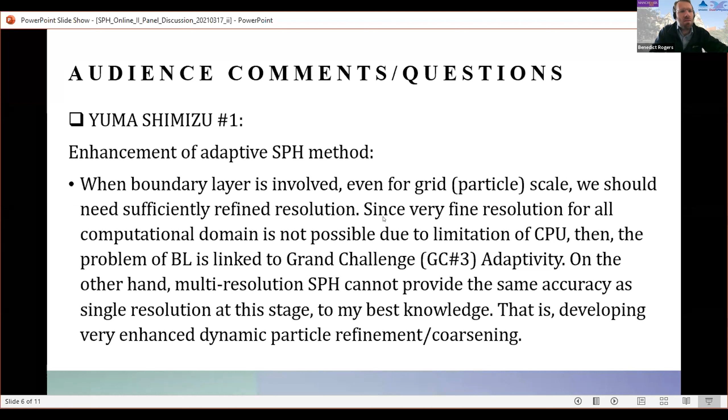So I wonder if I could bring in Professor Dias here, seeing as we spoke about benchmarks. The comment by Yuma was, since one of the biggest advantages of SPH is easy handling of free surfaces, the benchmark test case for turbulence, which includes free surface boundary conditions and has rigorous theoretical solutions, is best. You're coming at this from a slightly different perspective because you are looking quite often at extreme waves and fluid structure interaction.

Suggesting benchmark test cases is quite fraught with difficulty. Have you changed your opinion at all listening to all of the talks today?

Well, I mean, developing benchmarks has never been easy, and as you know, we developed this benchmark for ISOPE, and it was definitely a challenge. And then it was not only SPH, it was all types of methods. Because it's difficult doesn't mean that we shouldn't do it. The benchmark we developed for ISOPE was something theoretical because we couldn't do the experiment.

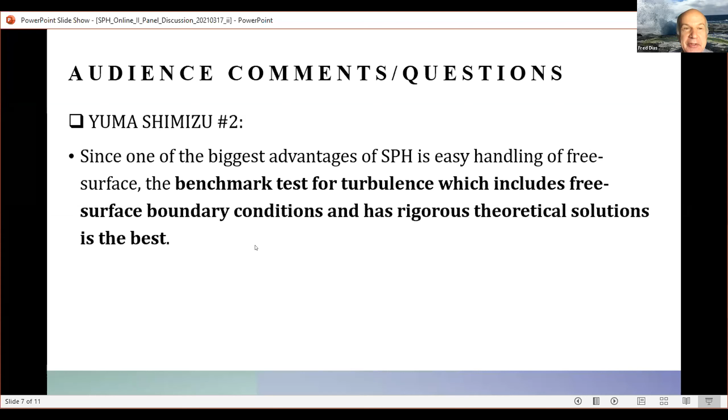Yes, I'm not so sure. As you mentioned, the multi-phase aspect is definitely a key aspect of wave breaking. Well, that's maybe 20 years ahead of us. Yeah, well said.

Okay, there were just a couple of other comments or questions that came through for the panel. So Pengnan Sun earlier asked, is there any benchmark test for turbulence modeling of multi-phase flows? My guess is that there is, for very constrained cases. Can any of the panel answer that question for Pengnan?

It depends on what is called multi-phase flows. Exactly, it depends what is a multi-phase flow. The wave breaking case, depending on the surface the wave is breaking on, can actually be a three-phase problem.

Ming asked quite a good question. It seems that SPH is inherently good at simulating turbulent phenomena compared with grid-based methods - that's possibly arguable at the moment. Therefore, should the criterion for selecting or incorporating turbulence models in SPH be different from the criterion in grid-based methods? And can we roughly establish a criterion or a list of situations about what conditions should the turbulence model be used in?

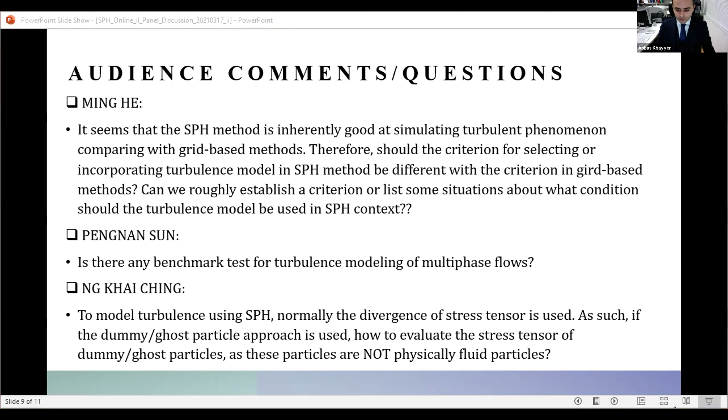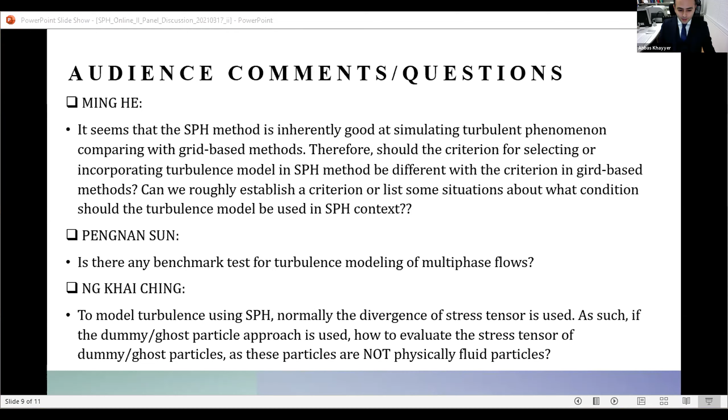Thank you so much, Ben. I think the panel discussion was absolutely impressive and, in fact, fruitful especially for young researchers working in the field of SPH, because you shed light on the state of the art of turbulence modeling and also inspired young researchers for rigorous research in this regard.